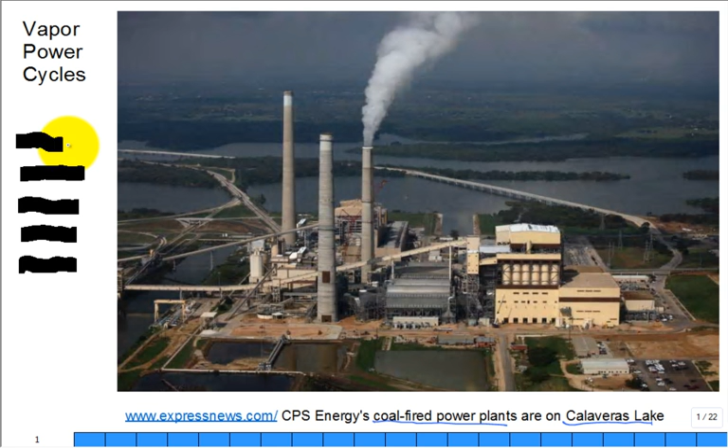How else do you get electricity? You're a consumer of electricity. How do you get it? Where does it come from? Especially if you're purchasing it from CPS Energy. A lot of it's made by coal. How else? There's almost zero hydro in San Antonio. If you're in Tennessee, there's a lot of hydro. In the state of Washington, there's a lot of hydro. But there's a lot of nuclear.

Did you know about 30% to 40% of the electricity consumed in San Antonio last year and for many years running now has been generated using a nuclear power plant? Where's a nuclear power plant that's generating electricity we're consuming in San Antonio? Bay City. There's 2 units. For a while, they were proposing to grow it to 3 and 4 units, and then that got squashed by the city council, through some input from the citizens and debates, etc.

There's another couple of units somewhere in the state of Texas. They're not owned by CPS Energy, or CPS Energy doesn't own a part of it. CPS Energy owns a part of the ones in Bay City. Anybody from up in the Fort Worth area? Yeah. Comanche Peak. They have 2 units up there. They've also proposed to build additional units.

They have the lake capacity there, the site capacity there, but nobody's touched expanding nuclear power in the United States for quite a while. But probably some of you may end up in that industry. I know some grads from UTSA, both electrical as well as mechanical. I don't know any civils who are in the nuclear power plant industry.

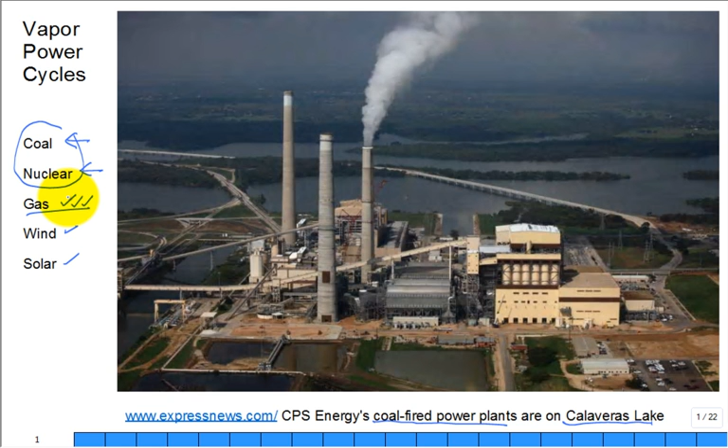So, but these boil water, make steam, pass it through a steam turbine, and now let's move on and study this. So we're going to talk about the Carnot vapor power cycle, and then we're going to talk about the Rankine vapor power cycle. So I thought I'd spend a minute talking about this person whose name is still kicked around. So Nicolas Léonard Sadi Carnot was in France. These are the years that he lived.

So he lived at the early part of the Industrial Revolution, and you could do the math from the year he was born to the year he died, and guess what? That's sobering news for all of us, isn't it? He only lived to be 36 years old. But he did something when he was around, I think the math shows me he was around 28 years old, that we still can talk about today.

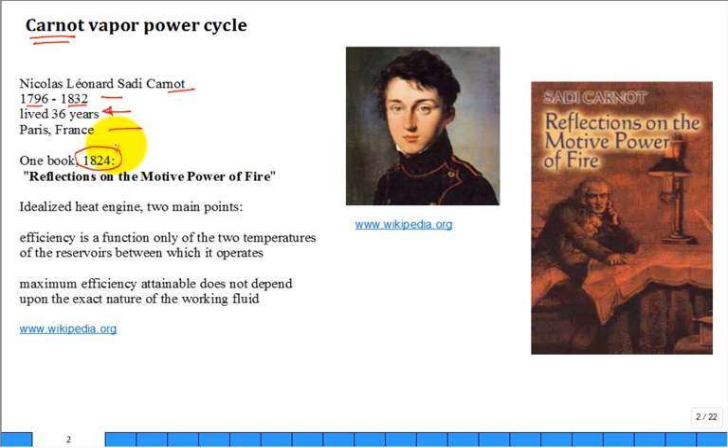He wrote a book, and it was titled in French, so they have to translate to English, but the translation in English is something like Reflections on the Motive Power of Fire. Thinking about how I can burn something, fire, to produce mechanical power. Very unique. This is really the beginning of the Industrial Revolution. Before it, if you needed to move something, you did it with human muscle or animal muscle. Now, you could actually burn something and it could do work.

Now you think today in 2018, that's so straightforward. Of course, no. Only a few hundred years have we had the Industrial Revolution where you could actually burn something to do work, to lift something, push something, transport something, accelerate something. Otherwise, it was all human power, muscle, or animal muscle.

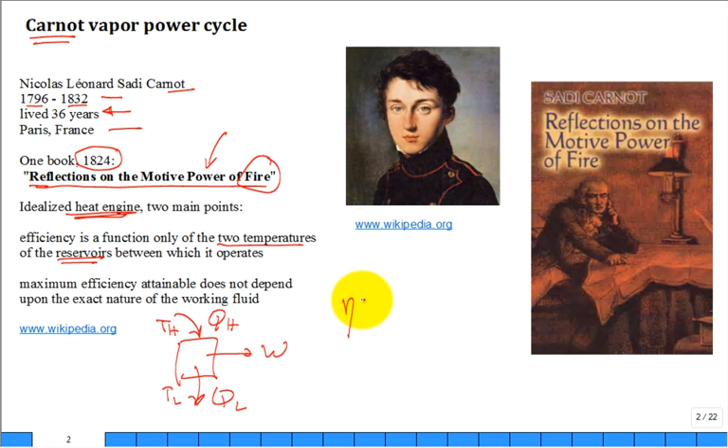Okay. So the key points, which you've studied already in Thermal 1, is that you have this heat engine. It's a device where you bring in some heat, some QH, and you want to convert as much of that to some useful work, but you've got to throw some away. QL, you just have to throw some away. You can't have 100% conversion of heat into work. But the two temperatures of the reservoirs, the TH where it comes in and the TL, what you reject, they basically dictate the efficiency. And then you say, oh yeah, I remember the thermal efficiency, 1 minus TL over TH. Recall? Yeah, he really had that.

And the second point, it really doesn't matter on the exact nature of the working fluid. And you say, yeah, I studied the Carnot, but it was ideal gas and a piston cylinder. That's the way it was introduced. You're exactly right. But we could also have water as a working fluid in a Carnot vapor power cycle, or even a refrigerant. It really doesn't matter what the fluid is. It could be ideal gas, could be water, could be refrigerants. So those are the main points.

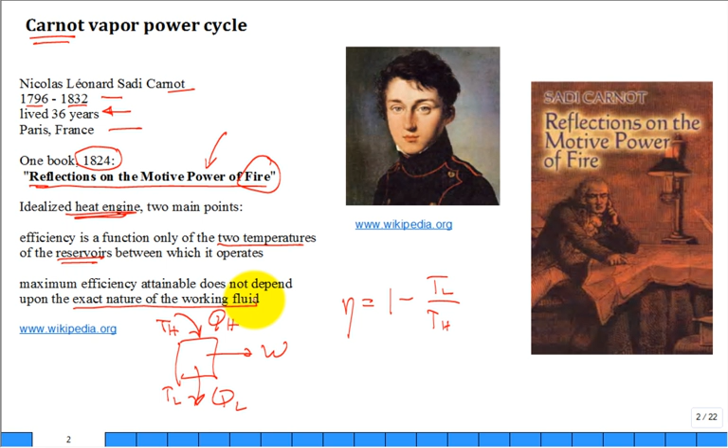Also, we're going to talk about the Rankine cycle. Now, the Rankine cycle, if you want to rename it, you could call it the practical Carnot. Some parts of the Carnot are not practical. If you make this change, it's not the exact Carnot cycle, it's the Rankine cycle, but it's very close to the efficiency of the Carnot. Well, it's named after this man who lived from 1820 to 1872. Again, early in the Industrial Revolution.

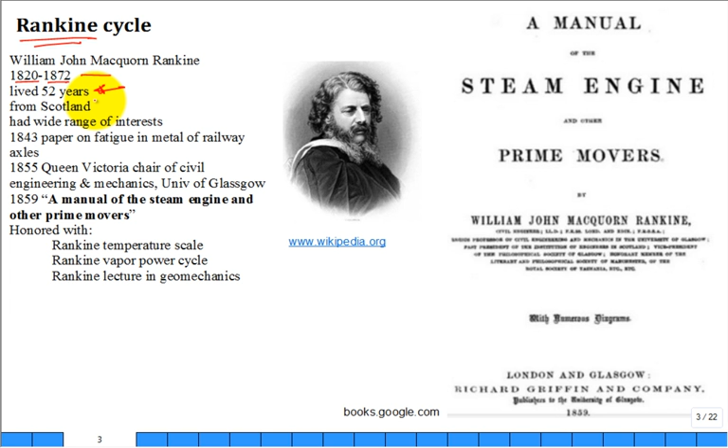Bad news for me. Look at that. What is this in thermodynamics? People don't live long enough. 52 is not a very old individual. Believe me, I'm past that. Yeah, it's sad.

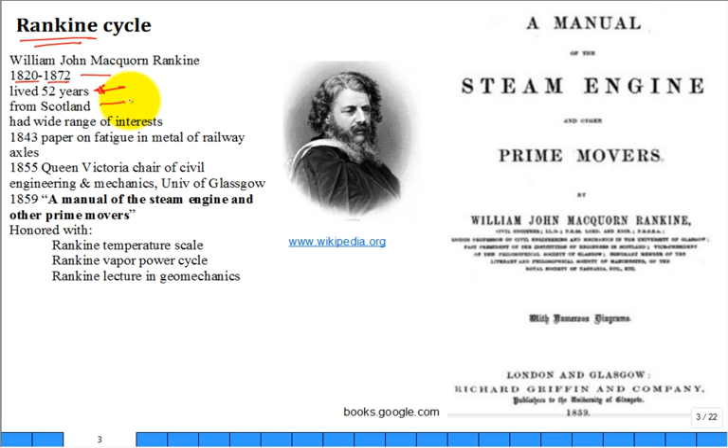But he grew up in Scotland. He was at the University of Glasgow. He was the Queen Victoria Chair of Civil Engineering and Mechanics, University of Glasgow. In 1859, he produced this book, a manual on steam engines, prime movers, etc. You can go to Google Books now and you can read it if you like.

He's honored with, yes, that temperature scale, absolute temperature scale in the U.S. customary system of units. Some people call it the English system of units, the Rankine temperature scale, as well as some lectures in geomechanics, I think some medal that's given out in this geomechanics area. And then what we here study is the vapor power cycle.

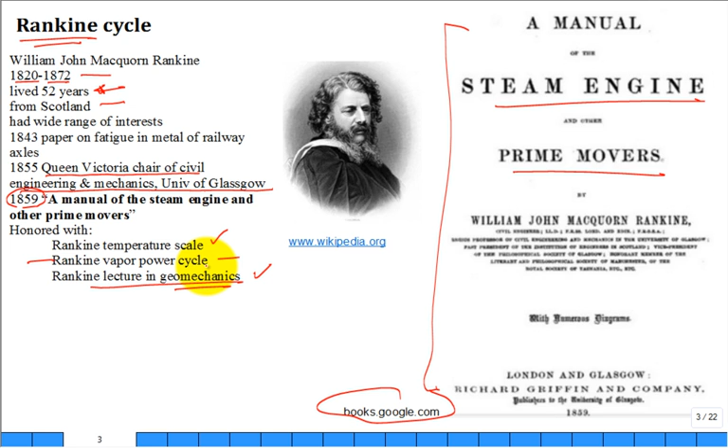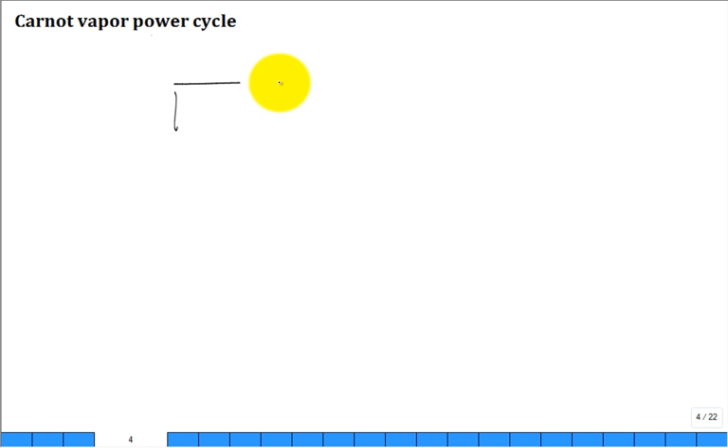So what exactly is the Carnot vapor power cycle? 4 components. Try to memorize them. You're going to have something to bring in the heat called a boiler into the working fluid. Out of the boiler will come some steam. Put the steam through a turbine. That is a device which will drop the pressure and expand the steam and push back blades on a rotating turbine to produce some work out. Work out of the turbine.

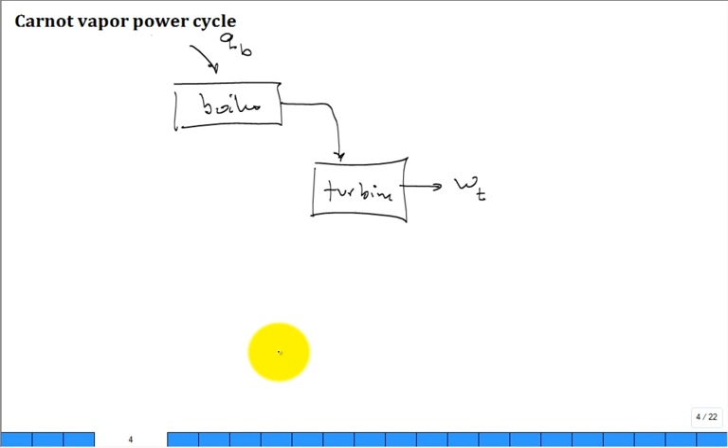This was Q into the boiler. Now we want to close the loop. What you have to do is you have to put it through a condenser. That's our third device, where it partially condenses in the Carnot vapor power cycle. When we get to the Rankine, it'll completely condense it, but just partially condense it because we're going to put it into this magical pump, which doesn't exist for the Carnot, which will then compress it and feed it back into the boiler.

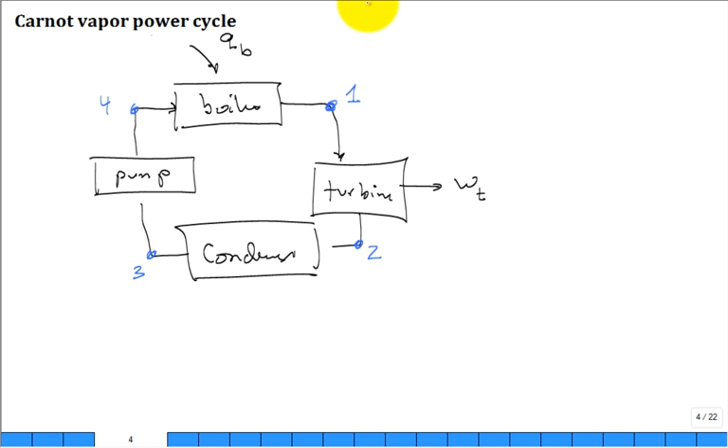Okay, so we have a numbering of states. Let's talk about state 1, that's outlet of the boiler, inlet to the turbine, and then state 2, state 3, and state 4. So we have 4 components and then 4 states of the steam between the major components. Okay, let's talk about the condition of the steam coming out of the boiler into the turbine. It's saturated vapor. That's what it's assumed to be. And it's going to be at a pressure P1, which is pretty high. And then if we compare, the pressure at 2 is a low pressure.

Let's just walk around and figure out our pressures. In our idealized boiler, the goal or purpose of a boiler is like a heat exchanger. It's not to increase or decrease the pressure. It's just to transfer energy by heat transfer into the working fluid. So what about the pressure at 4? How does that compare to the pressure at 1? It's the same. Yeah, it's the same. Likewise, the condenser. We are rejecting heat to the environment, and the pressure has negligible change, so we're going to assume P3 is equal to P2. There's really only 2 pressures in this system, the high pressure and the low pressure.

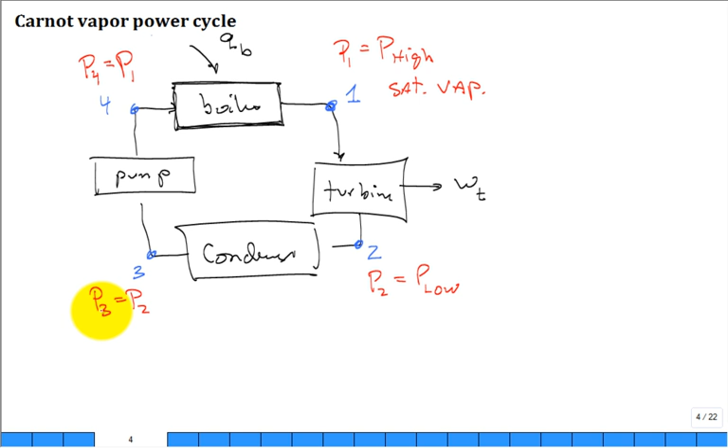All right. Now we go back to Carnot, and when you brought in heat, you had to bring it in to the working fluid at a constant T high. You can't have some of the heat brought into the water at a low temperature of the water and then some at a high temperature of the water. The temperature of the water needs to be all the same high temperature. This is very tricky. This is where a lot of people in Thermo 1 get very confused. And you probably struggled with this, or you remember struggling with it.

And you say, hold it, I have some fluid, I'm bringing heat in, the temperature has to go up. There's no way the temperature of the steam going through the boiler stays TH. Or can it? How can it? It has to in the Carnot vapor power cycle. How could it come in so the temperature at 4 is TH and the temperature at 1 is TH? How can that be?

It's saturated liquid on the inlet and saturated vapor on the outlet. Constant pressure, heat addition, all you did was boil it. So this is saturated liquid on the inlet. This is saturated vapor. If those assumptions are true and you're not changing the pressure, isn't T4 equal to T1? Isn't that the high temperature? Yeah, that's true.

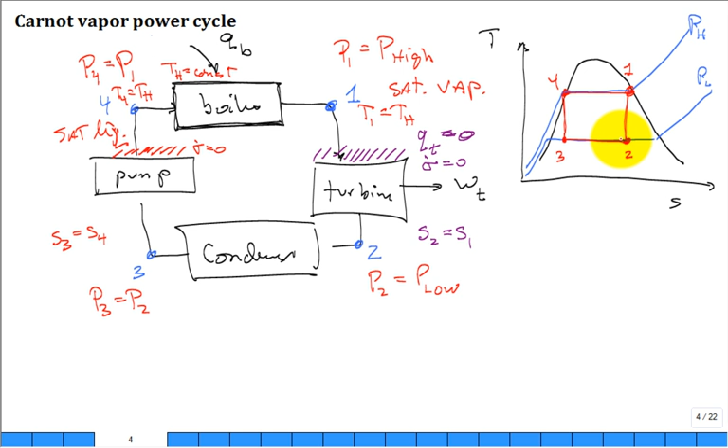Hey, when you had the other Carnot cycle on a TS diagram, wasn't it always a rectangle? Yeah, it's always a rectangle. All of the heat comes in at TH. All of the heat goes out at TL. Sometimes you draw it like this. This is the work out in the turbine from 1 to 2. This is Q out in the condenser. This is some work in with the pump, and this is some Q in the boiler.

All right. Well, if you got that, you're well on your way to solving some problems. So I'm going to revisit some of these aspects, but there's two metrics that are key when you have a power cycle. One is the thermal efficiency. What was our thermal efficiency of the cycle? What was that?

You're going to find numerically that you'll be able to have 1 minus TL over TH, and that's going to work. But here I'm going to take some net work out of the cycle, and I'm going to divide it by the heat that I had to pay for to bring into the cycle, which is to feed the boiler. Dumping heat in the condenser to the environment is not currently taxed. I'm not saying it won't be taxed in the future.

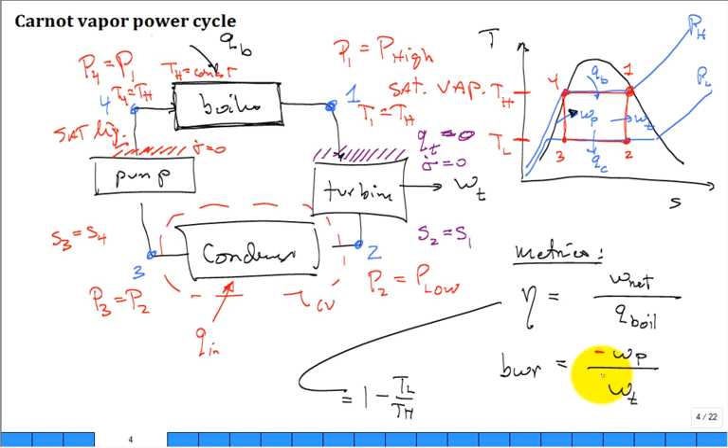All right, so let me do this. Let's spend a little time and go around each component and have a review of Thermo 1. So this is the boiler. What did I put in here for a little dashed line? A CV, a control volume. It cuts outlet state 1, cuts inlet state 4, and is there any W dot out of the boiler? No, that's zero. There's no shaft power in or out of boilers, or likewise condensers. They're just heat exchangers.

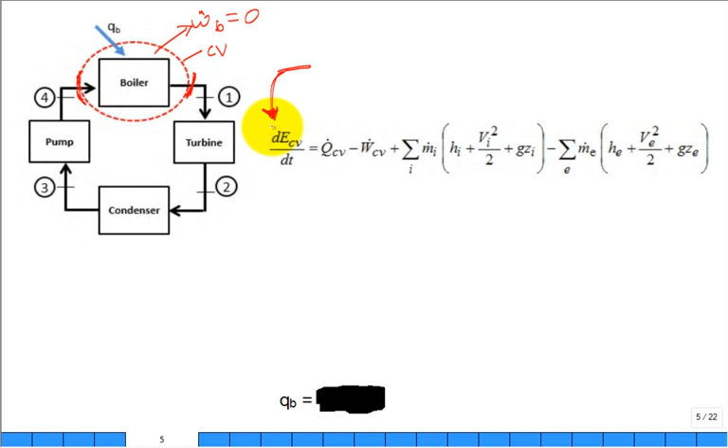What is this equation right here? First law, conservation of energy. It's our most general. So we write it for this control volume, and then we say, is this operating in steady state? If it is, what's that term equal to on the left-hand side? 0. If you neglect changes in kinetic energy and potential energy, these terms cancel. They're 0.

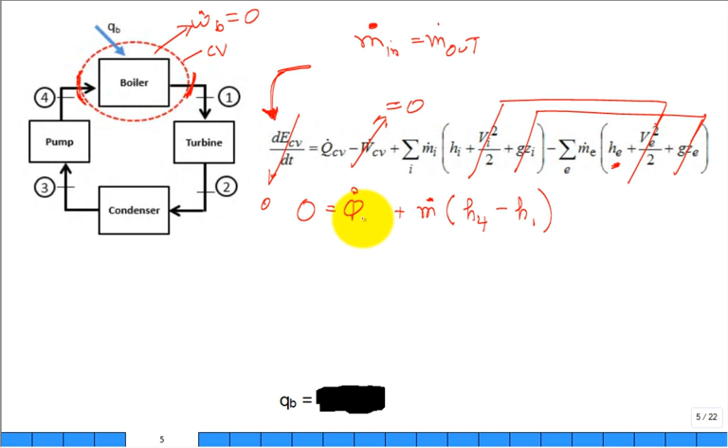If you have steady state, the mass flow coming in is equal to the mass flow going out, and we just have one m dot. Then you can rewrite this as the mass flow rate times the enthalpy coming in, H4, and the enthalpy exiting, H1. True? What about this work term? That's 0, there's no mechanical power out. So we have 0 is equal to Q dot into the boiler plus the mass flow rate through the boiler times H4, the inlet, minus H1, the exit enthalpy. Did we follow that transition for this boiler? Thumbs up.

Then we put Q dot boiler divided by m dot through the boiler is equal to H1 minus H4. Did I do that math right? And what is the name of lowercase qb, with or without the dot? Lowercase qb is equal to Q dot b divided by m dot through the boiler. True. So this is like a specific heat transfer. What are the units? Kilojoules per kilogram. Q dot? Kilojoules per second. m dot? Kilogram per second. So the per seconds cancel, and life is good. This is all consistent.

So I will very quickly sometimes write this equation, and students go, where did that come from? I was getting a lot of this at the 8:30, so I spent some more time here. You need to do it. This is Thermo 1 review, but I just did a good review for you, okay?

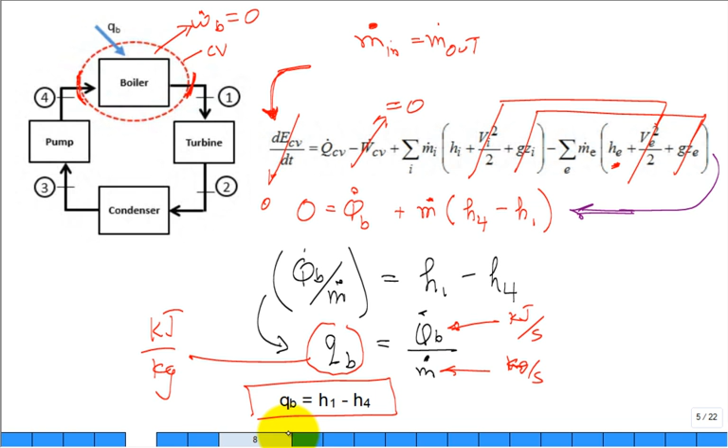Guess what we do next? Oops. All right, what happened? I lost on my thing.

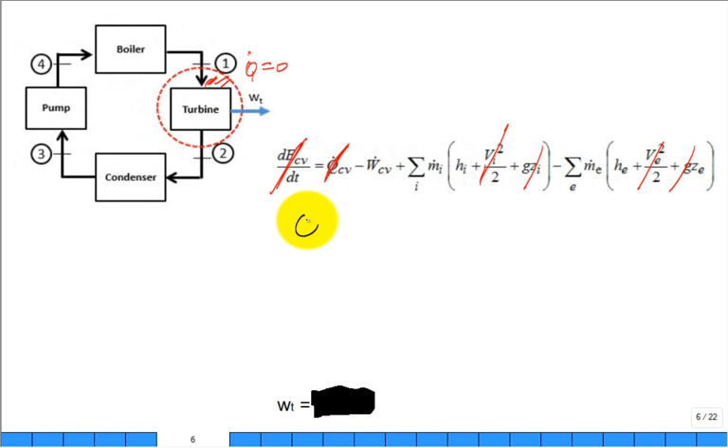Guess what we move to next? The turbine. You have to do it for each component and get these equations correct. So for the turbine, steady state, is there any heat transfer? No. Q dot for the turbine is 0, we have a well-insulated turbine. We neglect changes in kinetic and potential, one mass flow rate in, one out. So 0 is equal to the W dot out of the turbine plus the mass flow rate times H1 minus H2.

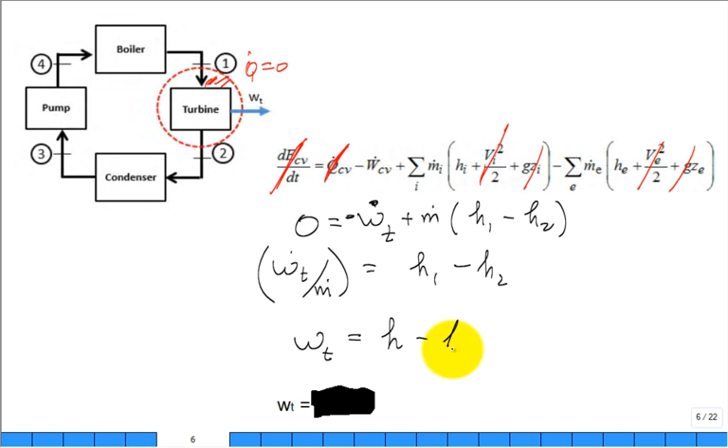You have W dot turbine divided by m dot equal to H1 minus H2. Sorry, right there, I dropped off that negative sign. And so this is the lowercase w subscript t, equal to the change in enthalpy. It comes in higher enthalpy, goes out lower enthalpy. What is lowercase q for the turbine? That would be Q dot into the turbine divided by the mass flow rate through the turbine. It's 0, isn't it?

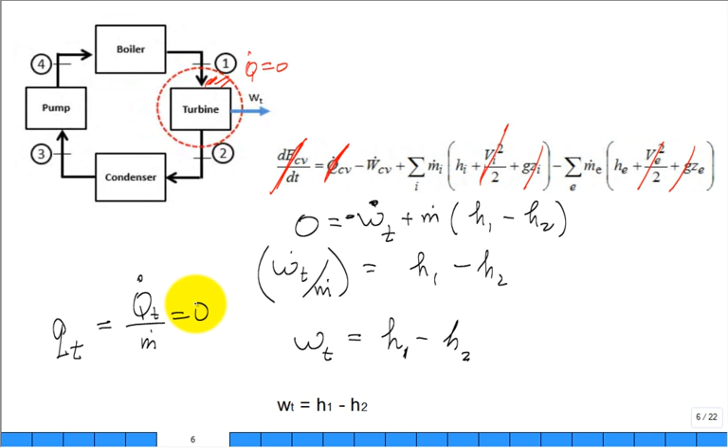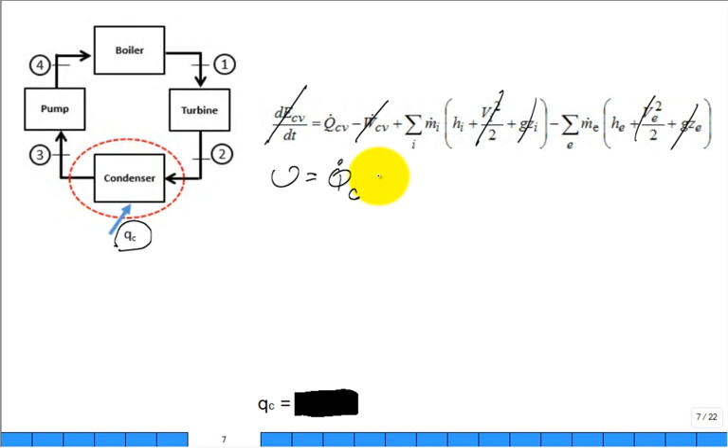All right, let's press forward. What about the condenser? What is the direction for that Q? What we're going to do is we're going to put QC as positive into the condenser. Okay, so it's steady state, no work or power, negligible changes here and there. So we'll get that 0 is equal to Q dot into the condenser plus the mass flow rate coming in H2 minus H3 going out. So Q dot C divided by M dot is equal to H3 minus H2. Look good? So lowercase q sub C is H3 minus H2.

That by nature is going to be negative. I personally like to avoid negative terms in my calculations, but this is one of the times early on, let's just stay with the sign convention, and we know it's a condenser. The heat is transferred out. But if we stay with our sign convention, we'll have a negative QC. So it'll be a lower enthalpy. H3 will be lower than H2. And minus a higher enthalpy, this will be a negative term.

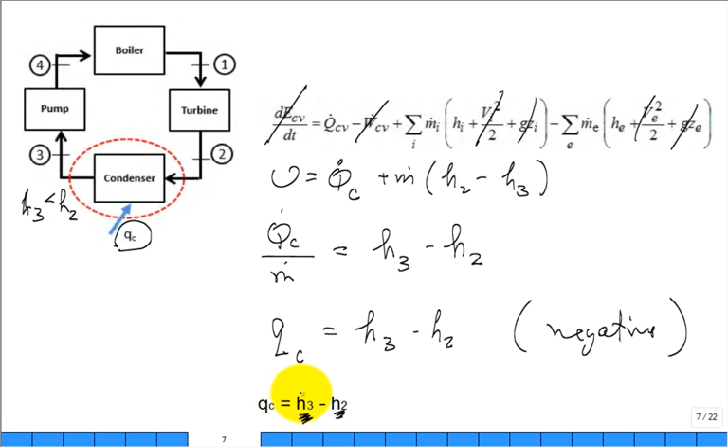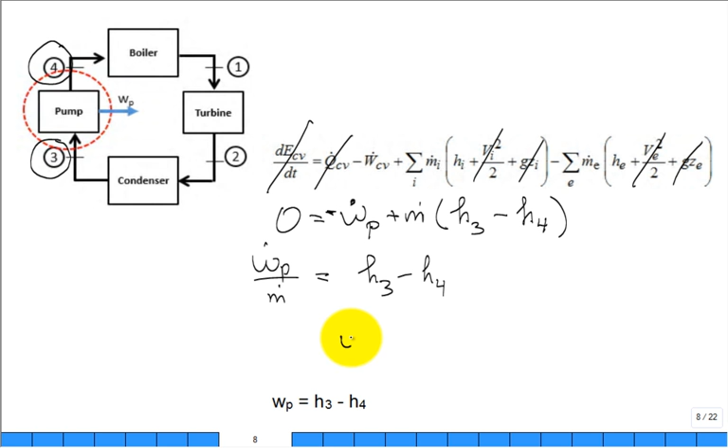Somebody says, I remember studying pumps, and there was this simple equation. The specific work of the pump is approximately V of the inlet fluid, if it's saturated liquid, if it's liquid going into the pump, times P4 minus P3. Yeah, that's true. And if you wanted, you put a negative sign on it. But this is getting a little ahead of ourselves. We'll review that. But does anybody remember that equation? It's at the end of chapter 6. It's only good if V is constant through the pump. And that would be if it's a liquid. Liquids are incompressible.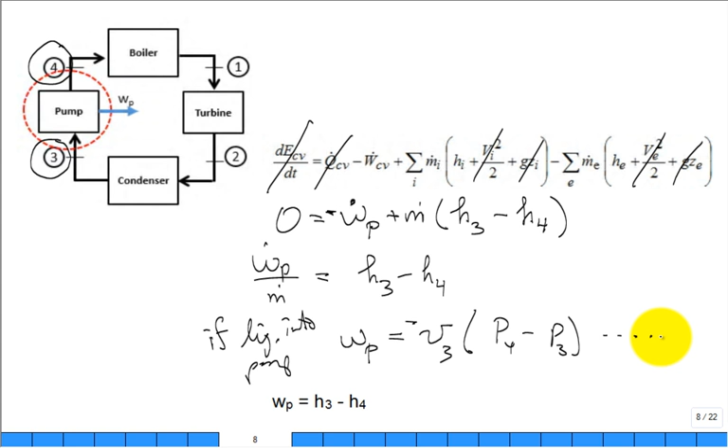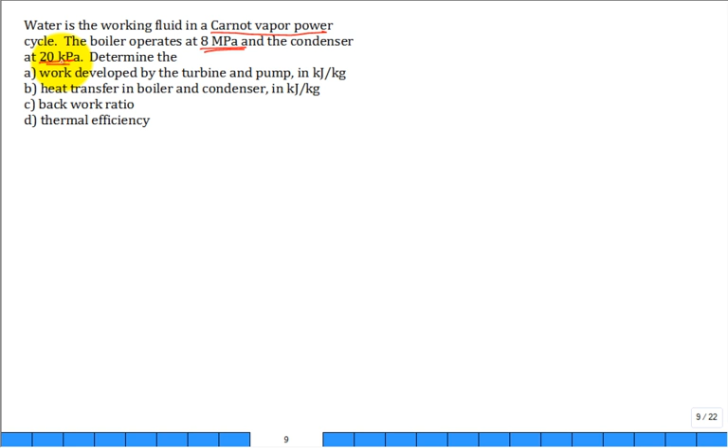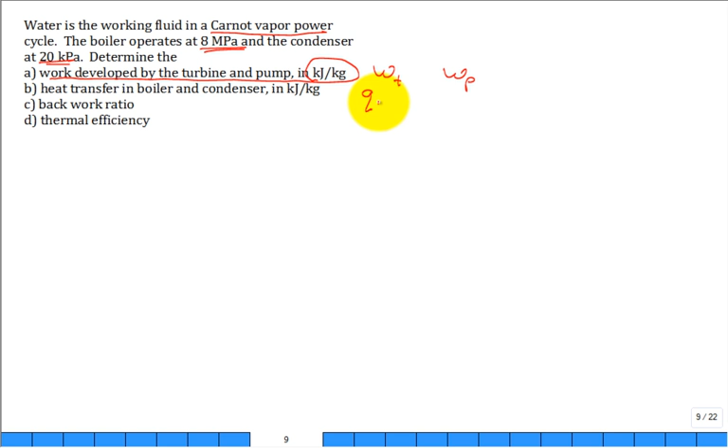So you're given a problem like this. Water is the working fluid in a Carnot vapor power cycle. The boiler is at 8 megapascal and the condenser is at 20 kilopascal, and you're asked to calculate things like the work developed by the turbine in units of kilojoules per kilogram. So that's W sub T, and then how about the pump? W sub P. 2 answers for part A. And then the heat transfer in the boiler and condenser, lowercase qb and lowercase qc, for the answers for part B. Then the back work ratio and the thermal efficiency. These are traditional things to be solved for.

How do you approach solving this problem? Step 1, this seems almost too simple. Get a schematic. Of what? Of the 4 components. And label the states. Isn't that already done in the textbook? Great, be consistent with it. But if you go to a different textbook, maybe state 1 is the inlet to the boiler and not the outlet from the boiler. So you would have your 4 components and your 4 states. What's the next thing you do? Well, I would say get a property diagram to help you. Which property diagram? Probably temperature entropy. You could get other property diagrams.

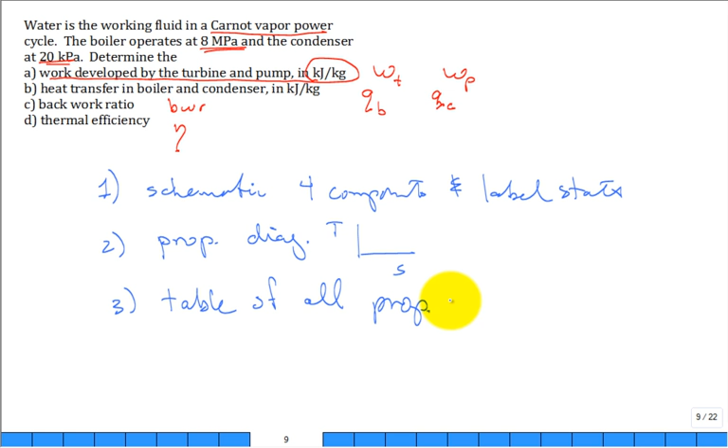How about for the third thing? I would get a table of all pertinent property values. And we already know the key property values are the enthalpies at those states. I really need to get the H's. I'll need the S's to help get the H's. So the property values are the pressure, temperature, quality, enthalpy, entropy. At what state? State 1, state 2, state 3, state 4. Get a table of all your property values, and the key ones are going to be the enthalpies at states 1, 2, 3, and 4. The next thing to do is get another table of all of your energy transfers. The energy transfers are the Q's, the energy transfer by heat, as well as the W's, the energy transfers by work.

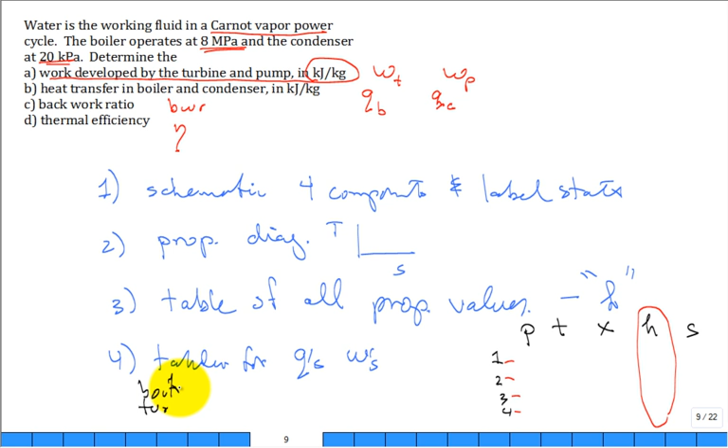And this would be for each of the 4 components. So I would put the 4 components: boiler, turbine. I'm running out of room. Let me scroll down a little bit. So it would be boiler, turbine, condenser, pump, and you'd say, okay, the Q and the W, and I'm going to try to stay with the sign convention, and then you'd say, well, this is the Q into the boiler, and then this would be the work done by the boiler. One of those 2 is 0. Yeah, so you could even put a 0 right away.

And then you say for the turbine, hey, that was insulated, but I need to calculate the work of the turbine. The condenser, Q of the C, 0. So anyway, there's 8 possible entities, but 4 of them are 0 values. Okay? But once you have all of these, what you could do is, if I sum all of the work column, what does that equal to? The net work. If I sum all of the Q's, what does that equal to? Q net.

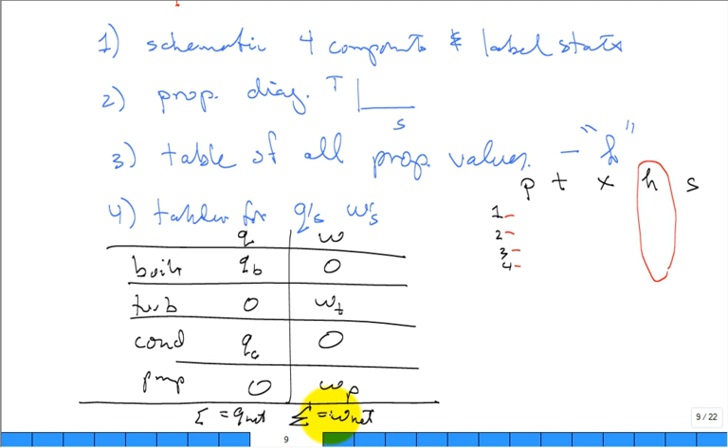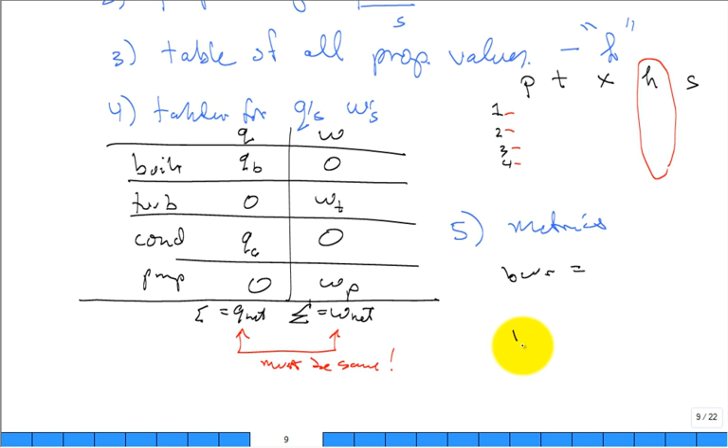For my problem, is the Q net equal to the work net? Absolutely must be. That's a good place to check your work. If it's not, look for your error. These must be the same. All right? And then the last part is to calculate the metrics. You could put them in a table. You don't need to put them in a table, but what is the back work ratio, and then what is the thermal efficiency? And the thermal efficiency is the ratio of this work net divided by the Q of the boiler. Pieces of information that are already organized in your table.

And in the back work ratio, I'm going to put the negative in front of the work on the pump because it's negative as the way I've written it. And then divided by the work out of the turbine. The information that you have already put into your tables to calculate the metrics. And the problem's solved. Okay?

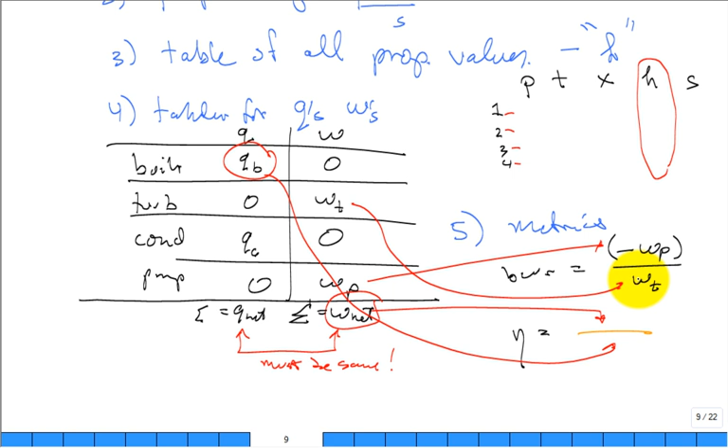So, you created a schematic of what? Yeah, make a sketch of the components and label your states. You say that's pretty trivial. I would also put in the property diagram, the temperature, entropy, put your states on the property diagram. That's a bad looking dome. Anyway, it looks like an A, doesn't it? Property diagram. Then you create a table of property values. The key: pressure, temperature, quality, enthalpy, entropy for this problem.

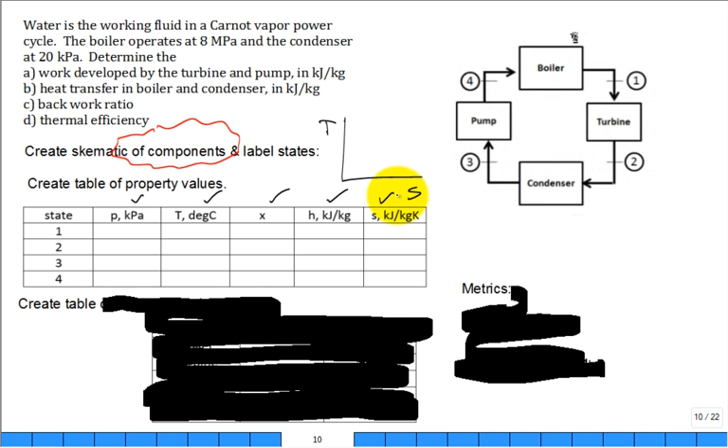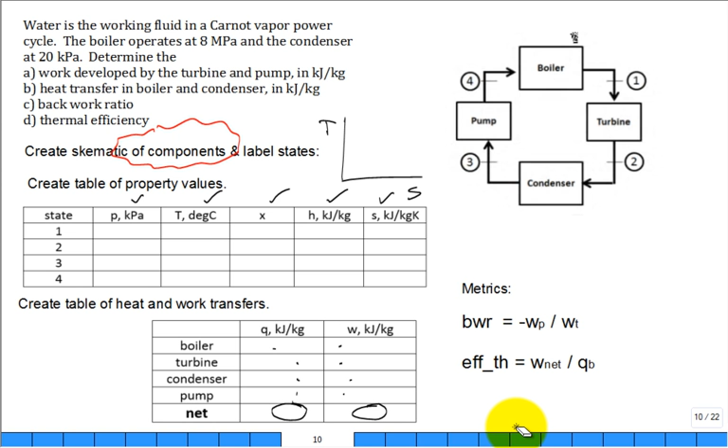Then create a table of all the energy transfers, the work and the heat transfers. Of these 8 entities, 4 are 0, and you're going to be interested in the summing of all the Q's and the summing of all the works. And then the metrics, 2 of them for sure, back work ratio, thermal efficiency. Does that overview help? How many people remember doing Thermo 1 problems like this? Yeah, you did, right? All right.

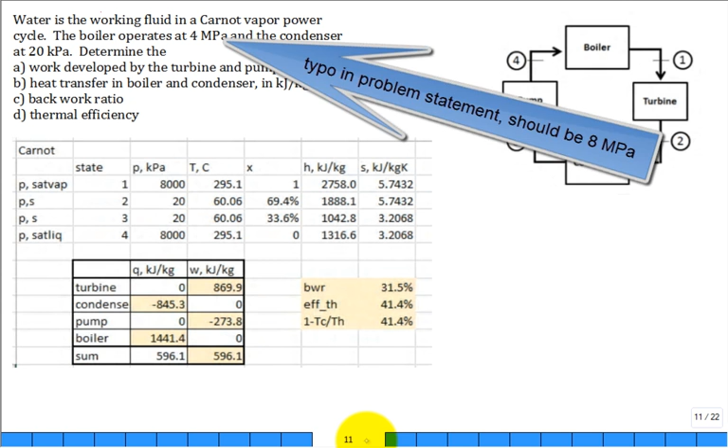So here is the solution to that problem. Okay. We had 8,000 kilopascal, which is 8 megapascal. P1 and P4 are the same. P2 and P3 are the same. I'm going to put it on a property diagram. Maybe I should have done that. Yeah, here it is. Let's show it on a property diagram. This is drawn to scale using some very, very reliable software, RefProp, which students can download the version for free, and you can reproduce this plot if you have the time and interest.

And so here is a temperature entropy. And what do we have? 8 megapascal is our high pressure. So right here is state 1. And right here is state 4. This is saturated liquid, saturated vapor. When you expand down to 20 kilopascal, it ends up being a quality 75% or less. And then that's state 2. State 3, you stop the condensation and put it through that special pump at a quality that looks like around 30%. So there's the property diagram.

All right. So let's jump back, take a look at some of the numbers. Around 70% for the quality at state 2. Around 34% for the quality at state 3. This is saturated vapor, saturated liquid. There's my S's. They're the same. These are the key properties, the enthalpies. A lot of work to get them, but once you get them, you can calculate the turbine work out, positive. Pump, it's shown to be negative.

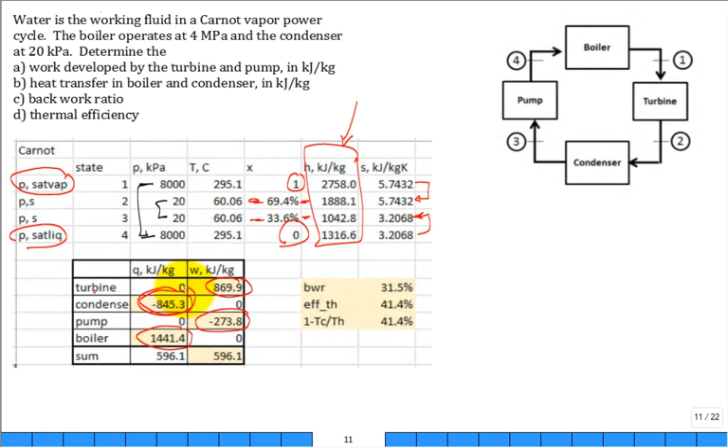The work into the pump and the heat transfer into the boiler and then the heat transfer into the condenser, which is negative. We sum these two columns, so Q net's equal to work net. And then here are our efficiencies.

And notice, this number of 41.4% is calculated going through all the tables and interpolating and getting those enthalpies and using them. And if you use the very simple equation that the Carnot efficiency should be 1 minus the low temperature over the high temperature, you get the same number to at least 3 significant digits, which is startling. Because it's like, I went all this through the equations and appendices with the quality, and yet the simple equation gives me the thermal efficiency. It's pretty neat. It's all consistent.

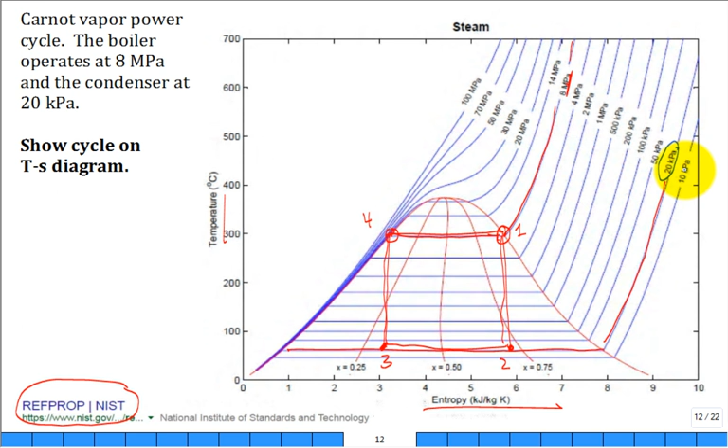All right, I should spend a little bit of time talking about 20 kilopascal. So, with this 20 kilopascal, if I look at the steam going through the condenser, is that in a state of vacuum or is it pressurized? In other words, if somebody comes by and accidentally pokes a hole in my condenser tube, if it's in a state of vacuum, the air on the outside will rush into the condenser. If it's pressurized, not a state of vacuum, then some of the steam will rush out into the room. So we know that P2 is equal to P3 is equal to 20 kilopascal.

So if you poke a hole in it, will air rush in or will steam rush out? Which way will it go? Okay, is this pure water inside the condenser? Or is it a mixture of water and air? The working fluid is pure water. The steam tables are for pure water, not a mixture of water and air or anything like that.

Okay, if it's at 20 kilopascal, is that an absolute pressure? I go to my steam tables, table A2, A3, etc. There's a lot of pressures in there. Are those absolute pressures or are they relative to atmospheric pressure? Are they gauge or absolute? They're absolute pressures. Okay. So what's the air pressure in this room? Roughly 100 kilopascal. Right?

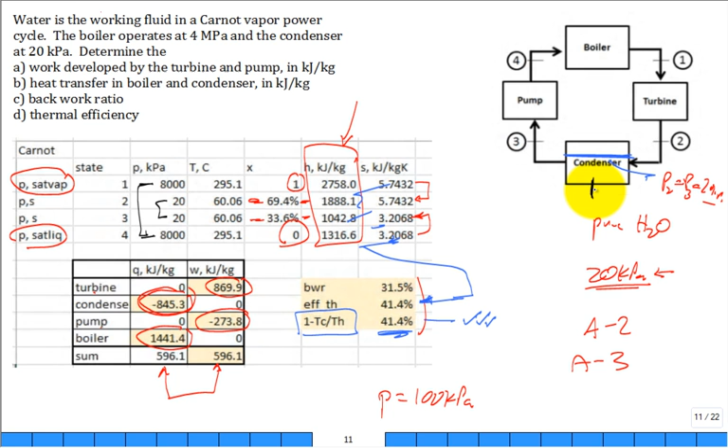In the Carnot vapor power cycle, the pump is not practical. It's impractical because the working fluid going into the pump, state 3, should be all vapor, all liquid, some liquid and vapor, too hot or too cold? It really needs to be all liquid. Pumps do not run well on a mixture of liquid and vapor.

They have not invented a pump that can take a 33% quality fluid that's at 60 degrees C and the 20 kilopascal low pressure, and pump it out to 8 megapascal, around 295 degrees C, saturated liquid. This pump does not exist. It exists on paper and in theory, but you can't go to Grainger, buy a pump and put it in. It's not going to work.

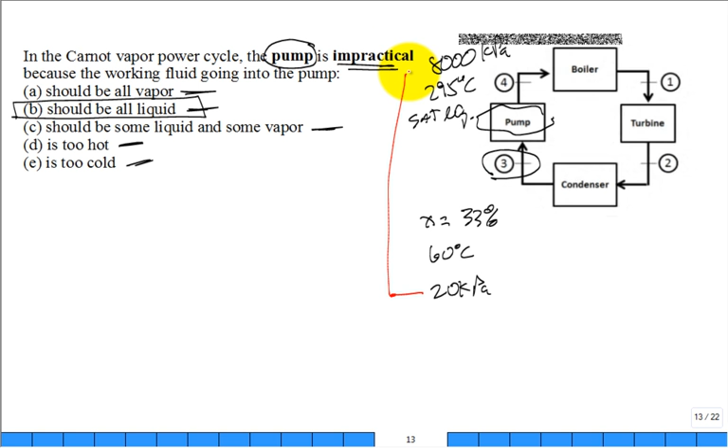If you want to boost the pressure, that's the primary goal here, from 20 kilopascal to 8,000 kilopascal, you usually use either a pump or a compressor. What's the difference between a pump and a compressor? This may be very obvious to most of us, but think about it. We see compressors in refrigerant systems, air systems, we see pumps in water systems.

And so the compressor is ingesting gases or vapors. Pumps ingest liquids. One of these is essentially incompressible. Which ones are incompressible? Liquids, they're incompressible.

Which ones are very compressible? Gases. And so when you boost the pressure of a gas, the temperature goes sky high. If you boost the pressure of a liquid, does the temperature go sky high? Nope. It stays pretty low, pretty modest temperature change. Maybe a smidgen, but very modest. We'll explore that in this lecture.

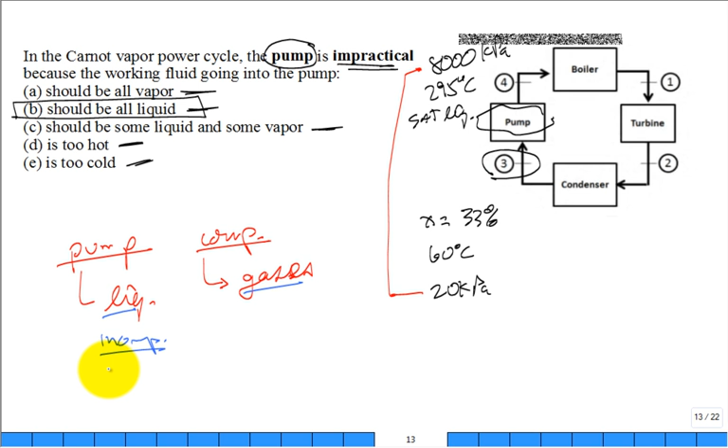So now it brings out what they call the practical Carnot cycle or the ideal Rankine cycle. All you do is you leave state 1 alone, you leave state 2 alone, you play with state 3. We need to feed the pump a liquid. So what we're going to do is condense it all the way, and this will now shift to be saturated liquid at state 3. Feed saturated liquid.

So what does it look like on our temperature entropy diagram? State 1 doesn't change. Maybe it's 8 megapascal saturated vapor. State 2 doesn't change. It's still 20 kilopascal and high quality. State 3 now doesn't stop here. It goes all the way over. There's state 3. Now, you put it through the pump, and now there's state 4.

And this is where it takes a little bit of thinking, but it used to be state 4 was right here. State 4 was saturated liquid feeding the pump. But where is state 4? Here or there? You know, location A or location B?

Well, if we have Q dot equal to 0 for the pump and sigma dot equal to 0 for the pump, adiabatic, reversible, what is S4 compared to S3 for the pump? The same. Luckily, we're on a temperature entropy diagram. This is the location of S3. Somewhere along this line of constant S is state 4.

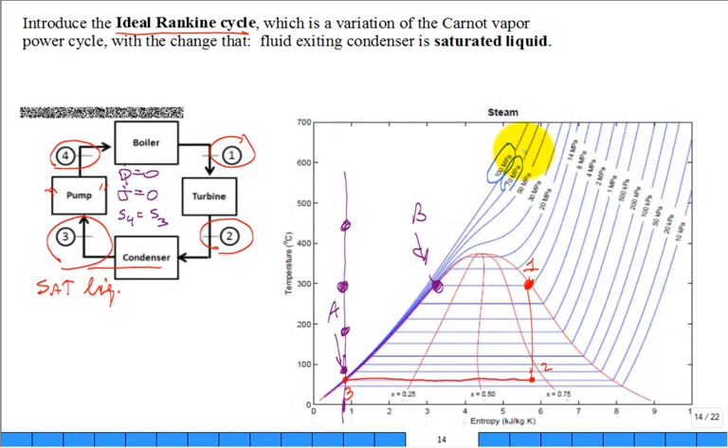But what is the highest pressure line shown here? Can you see that this is really a big change in pressure from here to here and then here to here? And so let's say somebody said, I want you to plot 120 megapascal. Where would you think the 120 megapascal line would be? You think it would be pretty close to 100 and out there. How about 200 megapascal? It'd be pretty close.

But even though you have a range of plots, this out here is kind of no man's land. Nobody goes there. You can't get water there. You can't get water with that low of an entropy and that high of a temperature. I mean, you'd have to get the pressure so high it's not seen on the Earth. Okay? So basically, you just don't get water out in those sequence of states.

Oh, you can get a lot of two-phase water. You can get around the critical point water. You can get around ideal gas behavior and supercritical steam. No problems. It's just out in here. It doesn't really exist. So if that helps you a little bit, can you see where state 4 now is? That's the hardest state. It's going to be right there on the TS diagram.

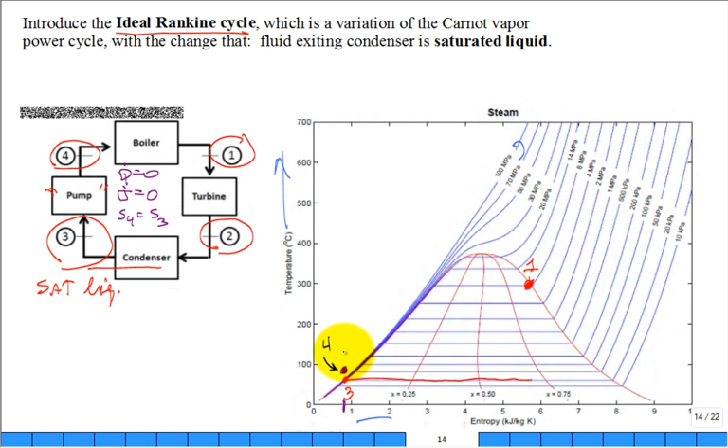So here is a TS diagram. We only put in the 8 megapascal and the 20 kilopascal to hopefully clean it up a little bit, easier to see. The circle is where state 1 is. This circle is where state 2 is. This circle is where state 3 is. And state 4 is actually plotted also on this diagram.

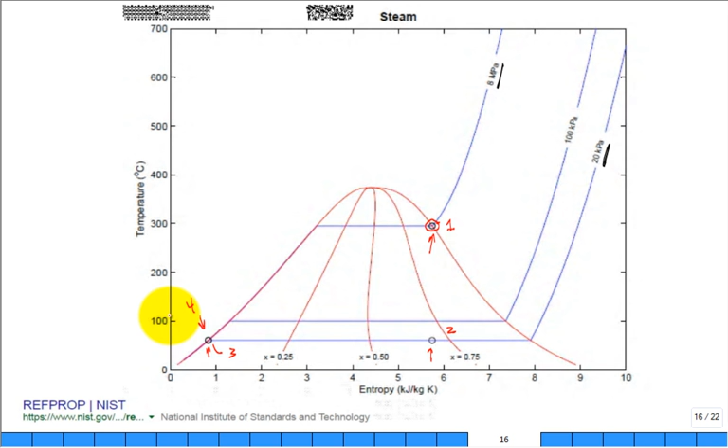But to the resolution of the diagram, it's very hard to see. There's only one circle plotted there, and there's actually two circles plotted so close together. State 4 is so close to state 3 that you have to zoom in. So what we do is we zoom in right in here on the next slide, and there it is.

There's actually state 3, and hey, didn't we talk about state 4 being constant S? There's state 4. State 3 is on a line of 20 kilopascal. State 4 is on a line of 8,000 kilopascal. This is drawn with very reputable software to scale.

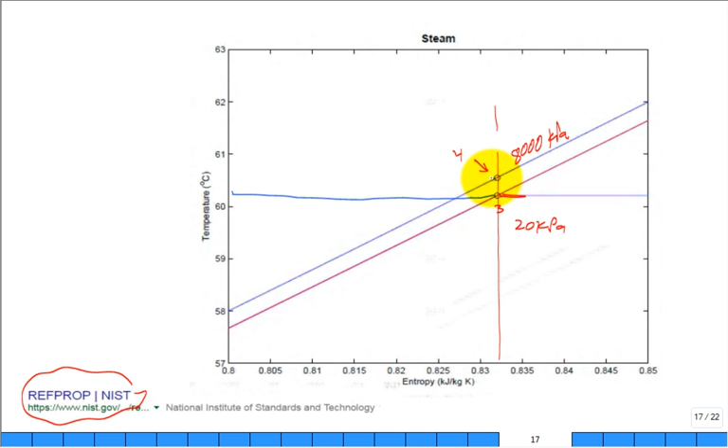Look at the temperature of state 3. Compare that to the temperature of state 4. Look at 60 degrees, 61 degrees, 62 degrees. What's the difference in the temperature maybe? Half a degree C. Oh, it's a little higher. But it's hard to see on a property diagram. And often you just neglect the temperature difference. But it'll be shown.

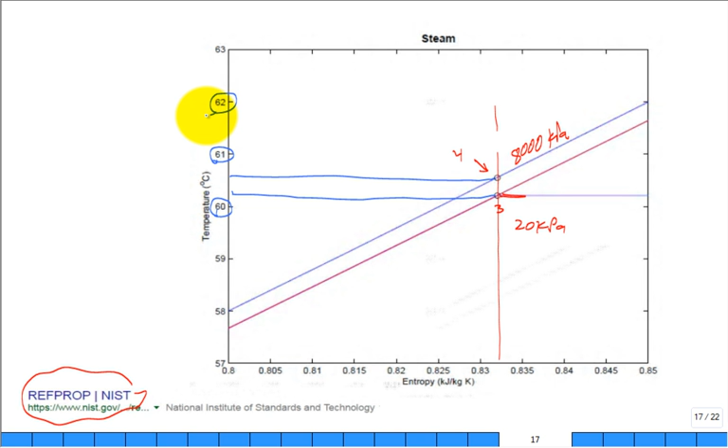Play around a little bit with state 4 because when you put it through that pump, then you remember from chapter 6, if I take an incompressible substance, I boost the pressure, there's a very simple equation. That's that VdP for the work. Otherwise, I have to interpolate in table A5, if you know what I'm talking about, when I have this constant entropy and I'm boosting the pressure up to 8 megapascal.

For this problem, I think I have it on the next slide. Yeah. I'll be looking for compressed liquid. That's the condition of state 4. At 8 megapascal, well, I have a table of 7.5 and 10, so right away I interpolate with respect to pressure. And I'm holding S constant through the pump. It's a double interpolation, and it's not as accurate as just using that VdP.

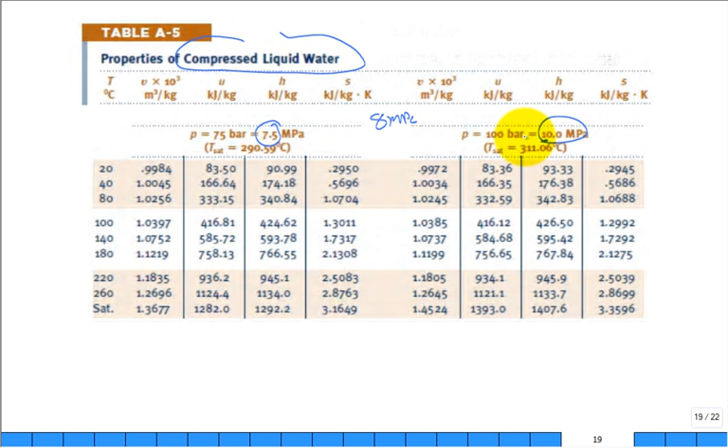Just use the VdP. I think most times you're reading the book, you say, why don't they just do the accurate interpolation of the data in our table? Well, it's because it's so coarse. It's not very refined. So you get your Q's and your W's. You check that the work net is equal to Q net. Calculate your metrics, back work ratio, thermal efficiency. You compare it with the Carnot. Remember, we just solved the same problem with the Carnot with the same high pressure and the same low pressure. How come they're not the same?

And once we understand why they're not the same, it guides us to improving the performance of the vapor power cycle. So that's what engineers do. They understand the system better, and they're better than the technicians. Sometimes the technicians, they have great insight, but they're limited as to how to improve the system. Hopefully the engineer has the insight of a technician and the experience of a technician, but also the knowledge to understand the system and predict how to change it to make it better.

So here's a question that we struggle with. This is a main theme of this chapter. Why did the thermal efficiency go down? All we did was condense it all the way to be saturated liquid right here. Why did it degrade the thermal efficiency so much? Did I introduce irreversibilities in the turbine? Is that it? Now I have a worse operating turbine? No, the turbine's the same. Do I have huge irreversibilities in the pump? No. We had isentropic efficiency of 100%. S3 is equal to S4.

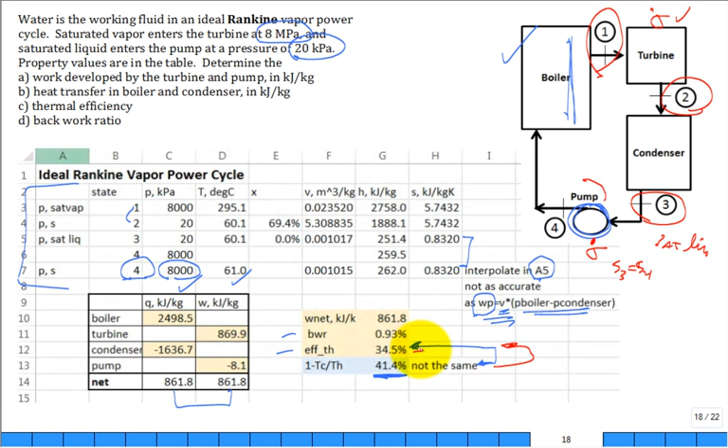I didn't change state 1 at all. It's saturated vapor coming out at that 8 megapascal. Really, state 2 didn't change at all either, but something profound changed. So in summary, our Carnot was a box on a TS. It's not a box on the TS here.

T4 is very, very close to T3. It's almost always grossly exaggerated on a TS diagram that's an illustration like this. I showed it to you to scale with the NIST software. But T4 will be so close to T3, it'd be very confusing to students. Like, T4 is lost. I mean, 0.4, where's state 4? Anyway, we do get a degradation in the thermal efficiency.

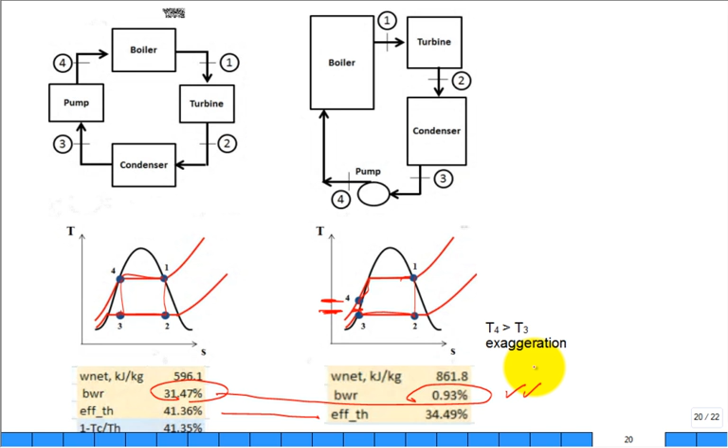One thing did greatly improve, though. Look at the back work ratio. We would like a low back work ratio. Why did that improve so much? Because it's cheap to run a pump. And it's very expensive to run a compressor. And we were having to do a lot of compression of that two-phase mixture going from 3 to 4. So, why is that thermal efficiency, the ideal Rankine, so much lower than the Carnot?

Well, I used to use a lot of clickers, so I have these questions recycled. Not using them this semester, but...

You scratch your head and you say, man, it's been a while since I thought about these irreversibilities. And you go back to chapter 6. Did I say there was no shame in going back and reviewing what you already learned, and you maybe have to refresh or dig a little deeper and glean a little bit more? But in chapter 6 or 5, I think they talked about what are the sources of irreversibilities. And I think it helps if you could just memorize them and then recite them.

One is friction. And we had the fluid friction, and that's what happens in turbines and pumps. And it's a catch-all. But it's not just always friction that does it. We have chemical reactions, a source of irreversibilities. Later in the semester, we'll get to that, like chapter 13 and 14. But we won't visit that as a topic of irreversibilities, and it's not the one here.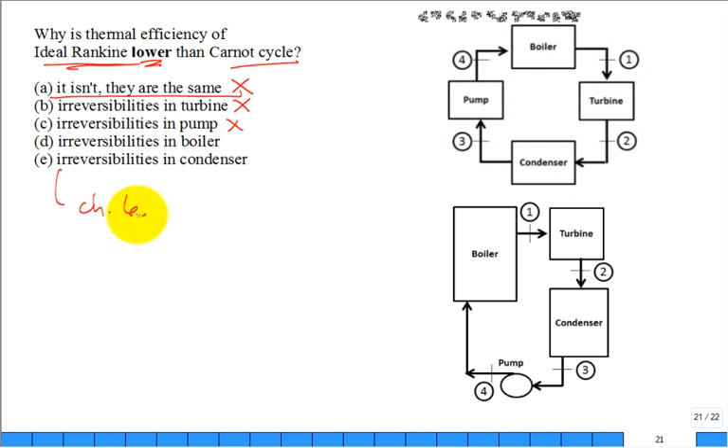But the one that's important here, that some of you may remember, heat transfer through a finite temperature difference. Whenever you have a finite temperature difference, if I have a wall and it's T1 on this side and T2 on that side, and I have some heat transfer through it, that's irreversible. The only way it can be close to not being irreversible is if T2 is so close to T1 that we talk about a constant temperature, the same temperature heat transfer.

But then when you study heat transfer, that's like an oxymoron. You need a temperature difference to drive the heat transfer. Or you need an infinitely large area to compensate, or you can be patient and wait an infinitely long time to achieve that heat transfer.

But here, what happens to the fluid coming into the pump? It's around 60 degrees C. We analyzed it. When it comes out of the pump, what is it around? 60.5 degrees C, right? When it goes into the boiler, the first couple centimeters into the boiler, what's its temperature? 60 degrees C. I dump some heat into it. Oh, it's finally 61. Oh, it's finally 62. It gets up to around 295 degrees C. Wasn't that our TH, our boiling saturation temperature at 8 megapascal?

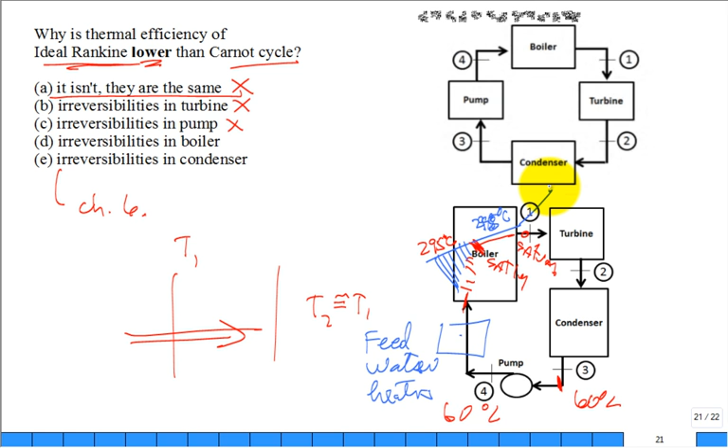The other thing is we're going to talk about superheating and even go into high pressures, supercritical, other ways of improving the system's performance.